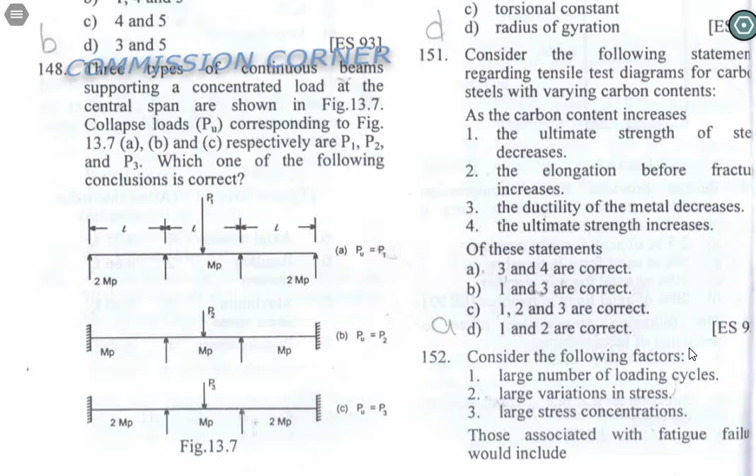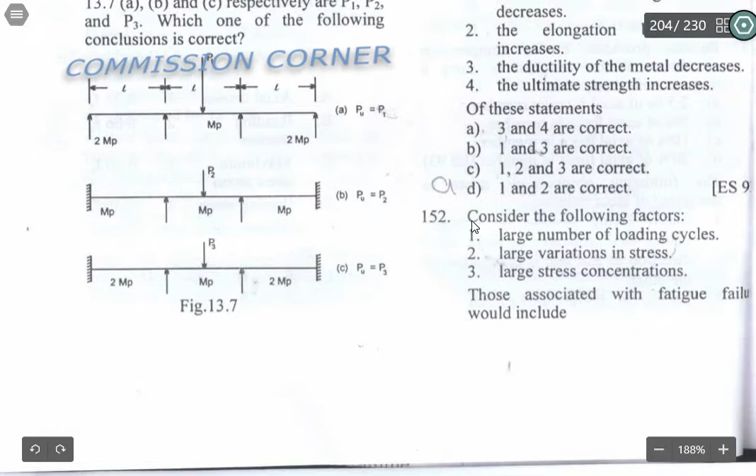Next question 152. Consider the following factors: large number of loading cycles, large variation in stress, large stress concentration. These are associated with fatigue failure. All three options are correct - first, second and third. So the correct option for this will be option number D. Let's move on to the next question.

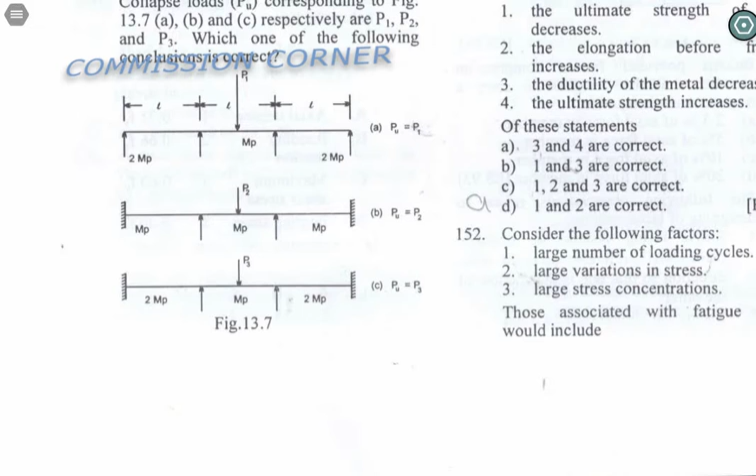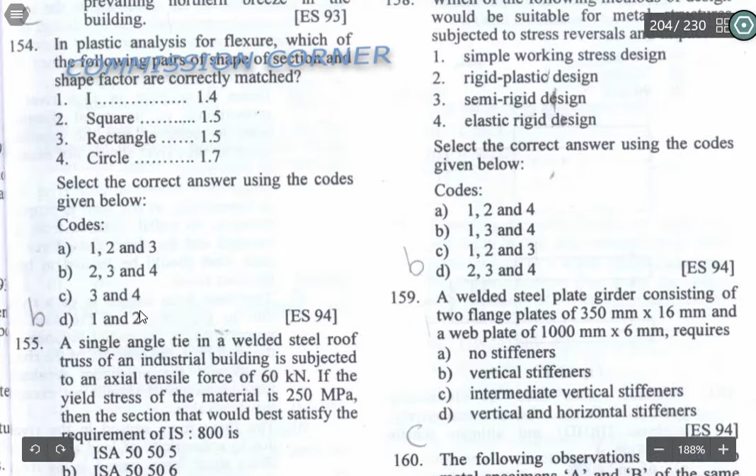Next question. A single angle tie in a welded steel roof truss of an industrial building is subjected to an axial tensile force of 60 kN, if the yield stress of the material is 250 MPa. Then the section that would best satisfy the requirement of IS 800 is...

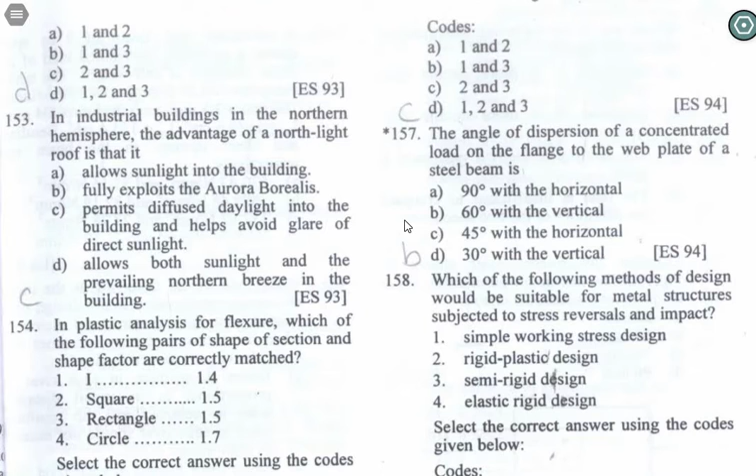Next question. The angle of dispersion of a concentrated load on the flange to the web plate of a steel beam is - option number B is the correct answer, 60 degrees with the vertical.

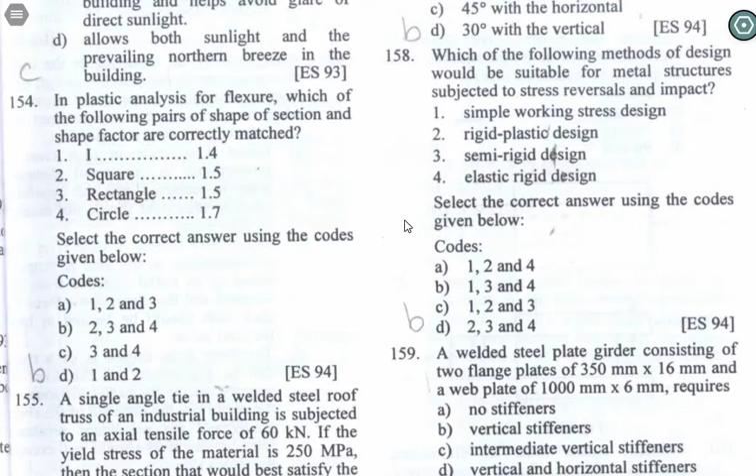Next question. Which of the following methods of design would be suitable for metal structures subjected to stress reversal and impact? Number 1 is simple working stress design. Second one is rigid plastic design. Third one is semi-rigid design. Fourth one is elastic rigid design. So the correct answer will be B.

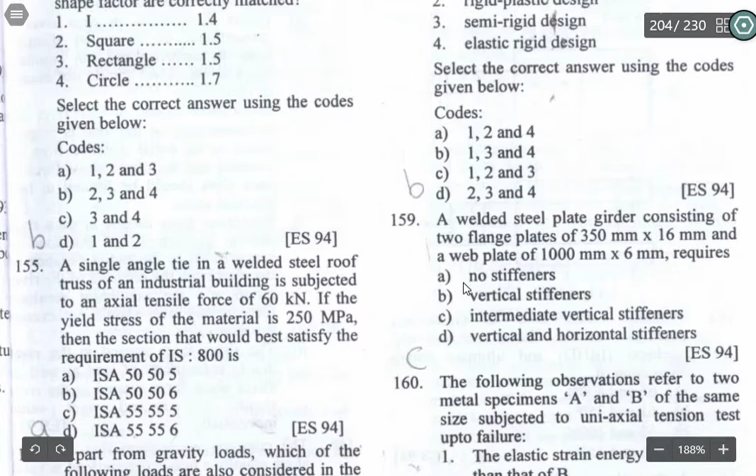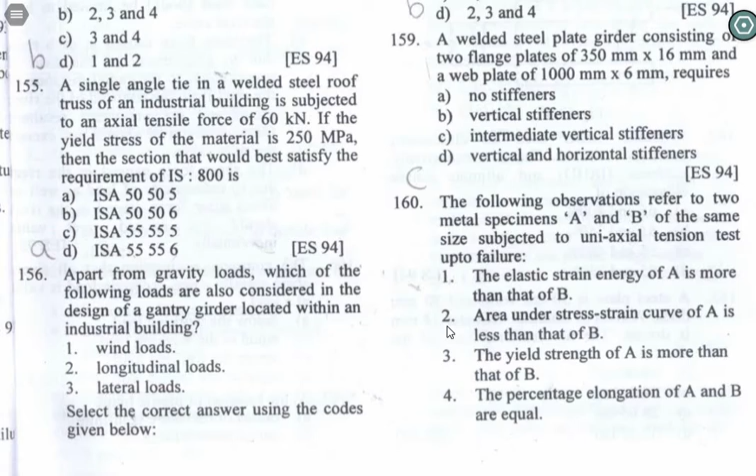Next, question 159. A welded steel plate girder consisting of two flange plates of 350 mm by 16 mm and web plate of 1000 mm by 6 mm requires intermediate stiffeners to be provided so as to transfer load from the mid part to the web plates, so that the structure won't cripple or buckle. So option number C, intermediate vertical stiffeners.

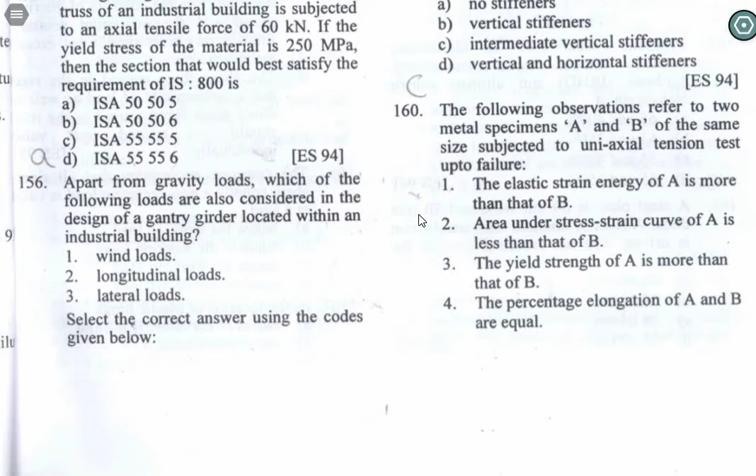Question number 160. The following observations refer to two metal specimens A and B of the same size subjected to uniaxial tension test up to failure. Number 1, elastic strain energy of A is more than B. Area under stress strain curve of A is less than that of B. The yield strength of A is more than that of B. The percentage elongation of A and B are equal.

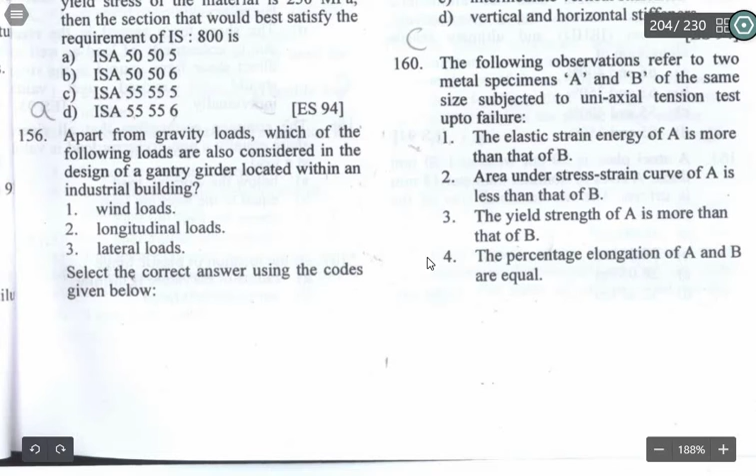तो ये हमें ऑब्जर्वेशन दी गई हैं दो स्पेसिमेन की, सेम साइज़ के हैं, यूनिएक्सियल टेंशन पे इनका टेस्ट हुआ है फेलियर तक के लिए। तो हमें ये कुछ स्टेटमेंट्स दी गई हैं, इसके हिसाब से हमें आगे नेक्स्ट क्वेश्चन पढ़ते हैं। इसमें लिखा है विच ऑफ द फॉलोइंग स्टेटमेंट इज ट्रू इन दिस रिगार्ड।

स्पेसिमेन ए इज मोर डक्टाइल देन स्पेसिमेन बी - नहीं। द डक्टिलिटी ऑफ टू स्पेसिमेन आर इक्वल - करेक्ट। डक्टिलिटी दोनों की इक्वल है, इसीलिए ऑप्शन सी इज द करेक्ट आंसर।

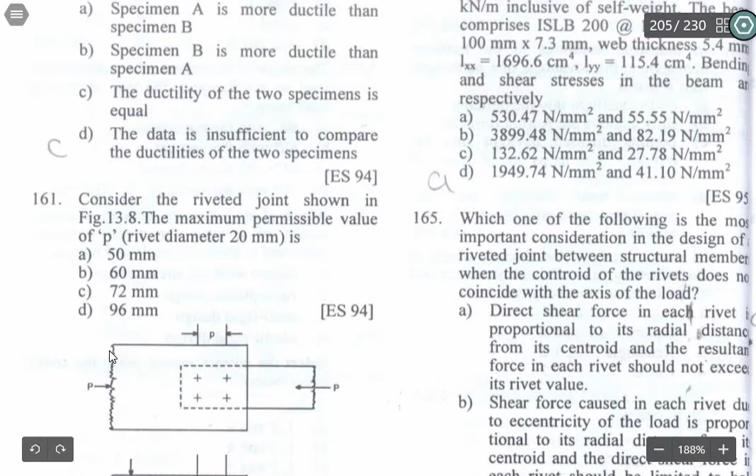Next question. Consider the riveted joint shown in the figure 13.8. The maximum permissible value of P, rivet diameter 20 mm is, here is the figure guys. यहाँ पे हमारा P है और जो रिवेट का डाया है वो है 20 mm. 12 mm हमारी प्लेट की थिकनेस है। 12 into 6 mm, 72 mm will be the answer. Option number C is the correct answer.

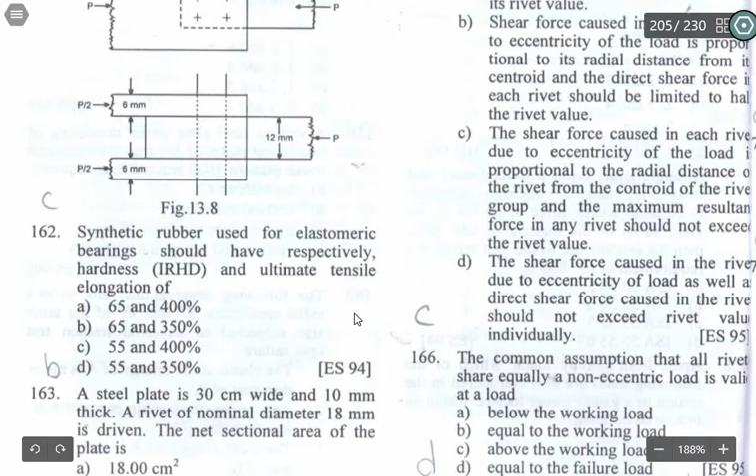Next question 162. Synthetic rubber used for elastomeric bearing should have respectively hardness IRHD and ultimate elongation of 65% and 350%. Option B is the correct answer for this.

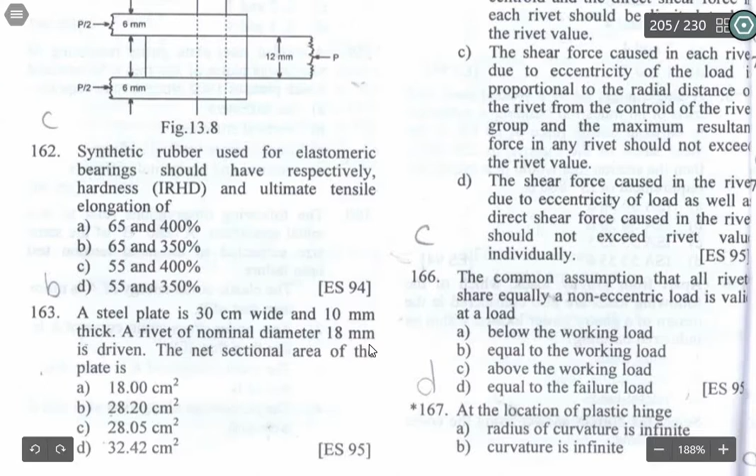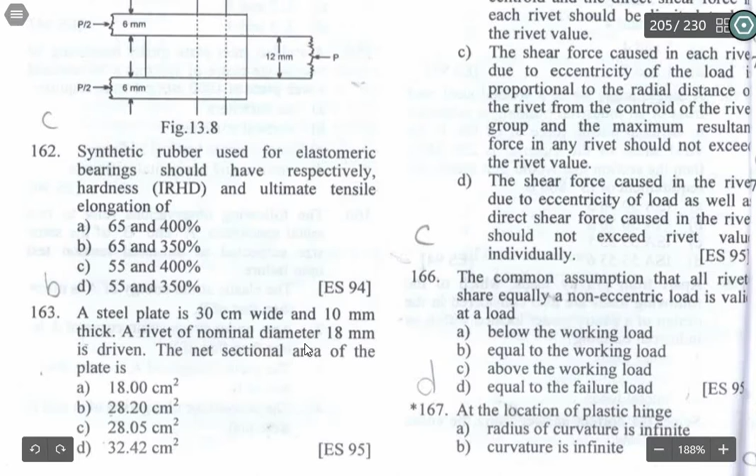Next question. A steel plate is 30 cm wide and 10 mm thick. A rivet of nominal diameter 18 mm is driven. The net sectional area of the plate is - steel plate thickness has been given, and the width of steel plate is given, nominal diameter of rivet is given, so net sectional area will be 28.05 centimeter square. Option number C is the correct answer.

Question number 164. A cantilever steel beam of 3 meters span carries a uniformly distributed load of 20 kN per meter inclusive of self weight. The beam comprises ISLB 200 at the rate 198 Newton per meter. फ्लैंज दिया हमें 100 mm 7.3 mm, वेब थिकनेस दी है 5.4 mm, आई ऑफ एक्स एक्स दिया, आई ऑफ वाई वाई दी है, बेंडिंग एंड शेयर स्ट्रेस दिया है, रिस्पेक्टिवली फाइंड करना हमें बेंडिंग और शेयर स्ट्रेस। तो as per this required data the answer will be the 530.47 and 55.55 Newton per mm square।

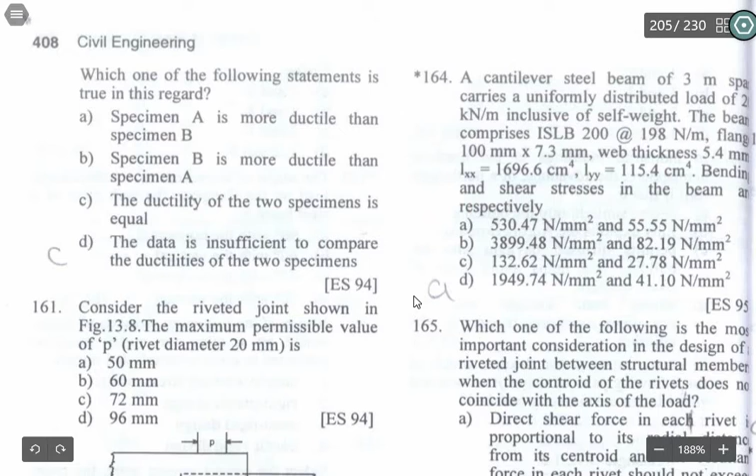ये सारी वैल्यूज़ मैंने कैलकुलेट करे हैं, इस करके मैंने ये मार्क किए हैं। अभी मैं यहाँ पे सॉल्व नहीं कर सकता हूँ, अगर आप चाहते हो मैं इन क्वेश्चंस को भी सॉल्व करूं तो कमेंट सेक्शन पे मार्क कर दीजिएगा। ओके गाइस, नेक्स्ट क्वेश्चन देखते हैं।

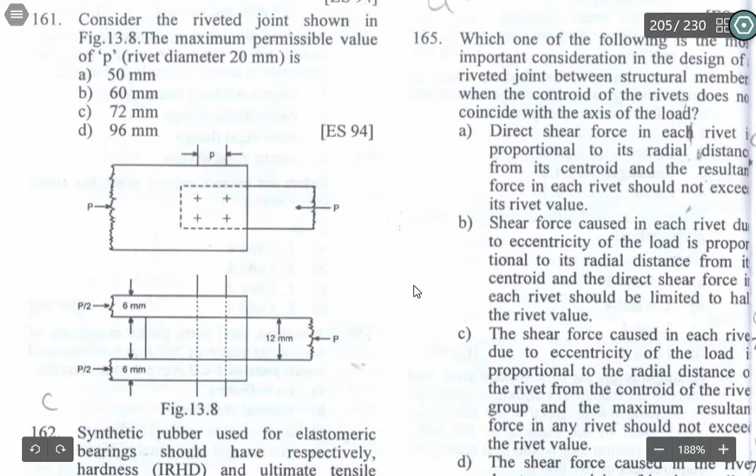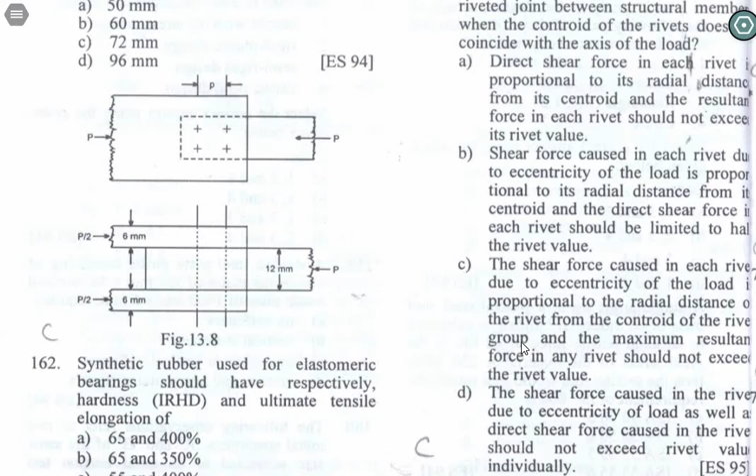Which of the following is the most important consideration in the design of riveted joint between structural member when the centroid of the rivet does not coincide with the axis of load? तो इसका ऑप्शन नंबर सी करेक्ट है। The shear force caused in each rivet due to eccentricity of load is proportional to the radial distance of the rivet from the centroid of the rivet group, and the maximum resultant force in any rivet should not exceed the rivet value। ठीक है गाइस, आप इसको गो थ्रू कर लीजिएगा।

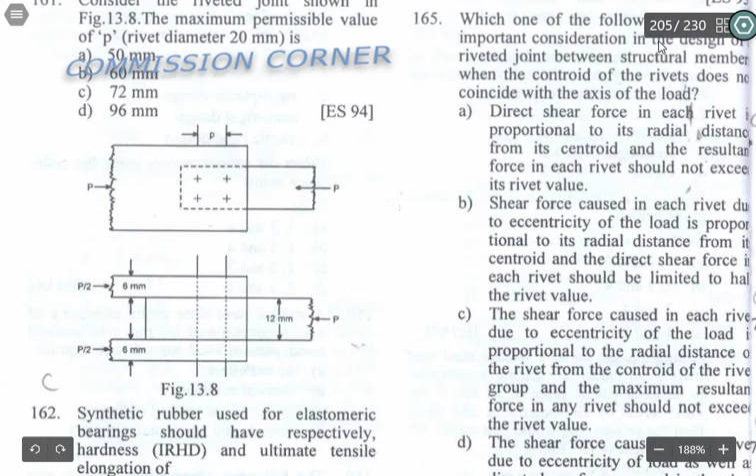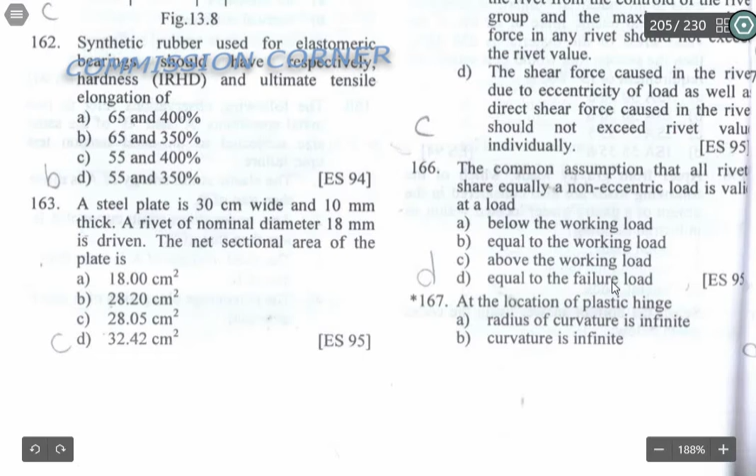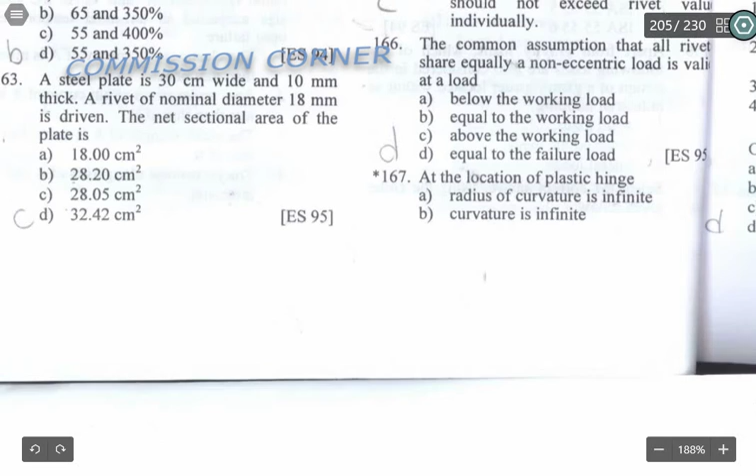Next question. The common assumption that all rivets share equally a non-eccentric load is valid at a load equal to the failure load, option number D is the correct answer. Next question, at the location of plastic hinge curvature is infinite, so the correct answer for this will be option number B, curvature is infinite.

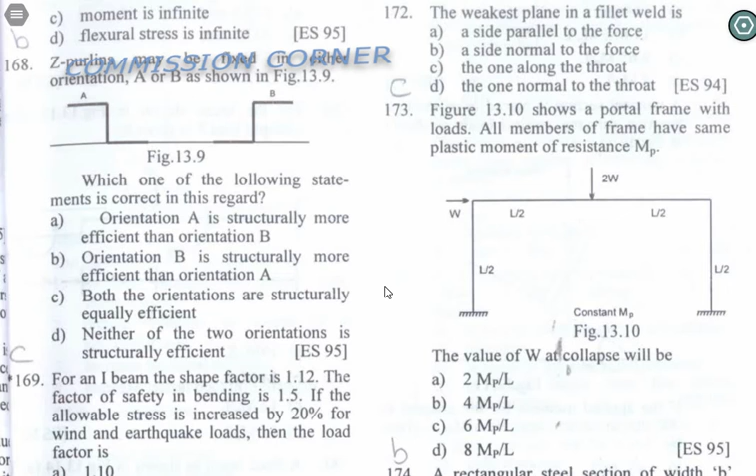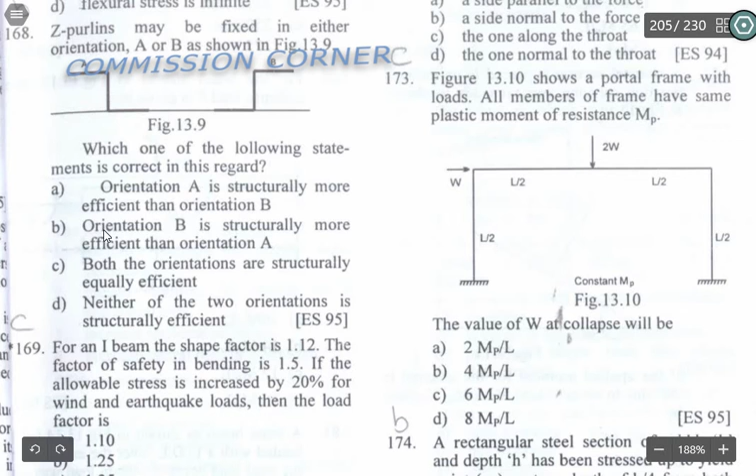Next question guys, 168th. Z purlin may be fixed in either orientation A or B as shown in figure, which of the following statement is correct in this regard? Orientation A is structurally more efficient than B, orientation B is more efficient than A, or both orientations are structurally equally efficient. देखिएगा आपके यहाँ पे दोनों Z पर्लिन हैं, और अगर ये दोनों एक हिसाब से अरेंज हैं तो दोनों की एफिशिएंसी सेम ही होंगी। सो ये ऑप्शन इज द करेक्ट आंसर।

नेक्स्ट क्वेश्चन 169th. For an I-beam, the shape factor is 1.12. The factor of safety in bending is 1.5. If the allowable stress is increased by 20% for wind or earthquake load, then the load factor is 1.4. So correct answer will be the option number D.

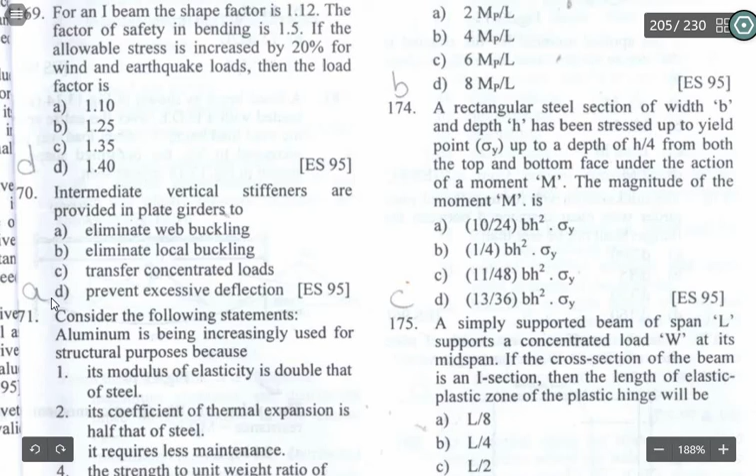So next question. Intermediate vertical stiffener are provided in plate girder to eliminate web buckling। ये अभी हमने पीछे पढ़ा था कि intermediate stiffener बीच में दिए जाते हैं, तो उनका रीज़न होता है एलिमिनेट वेब बकलिंग के लिए, जैसे मैंने पहले बताया था आपको, ताकि लोड ये कॉर्नर पे ट्रांसफर कर सकें।

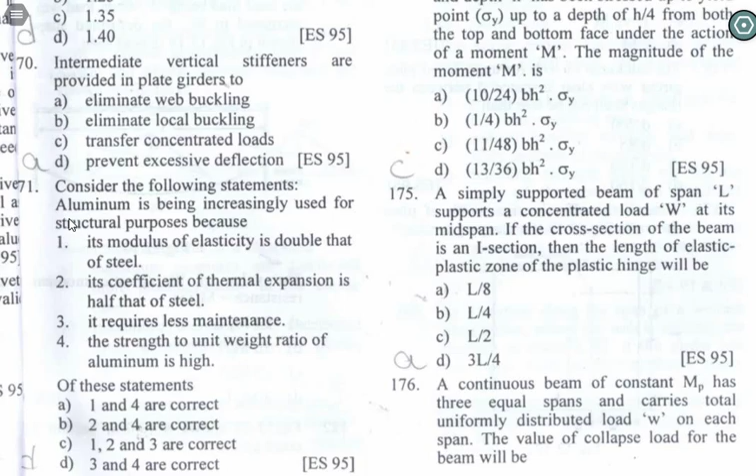नेक्स्ट क्वेश्चन। सो गाइस आज इतना ही करते हैं। आज हमने 150 to 170 क्वेश्चन किए हैं। उम्मीद करता हूँ आपको वीडियो पसंद आ रही हो।